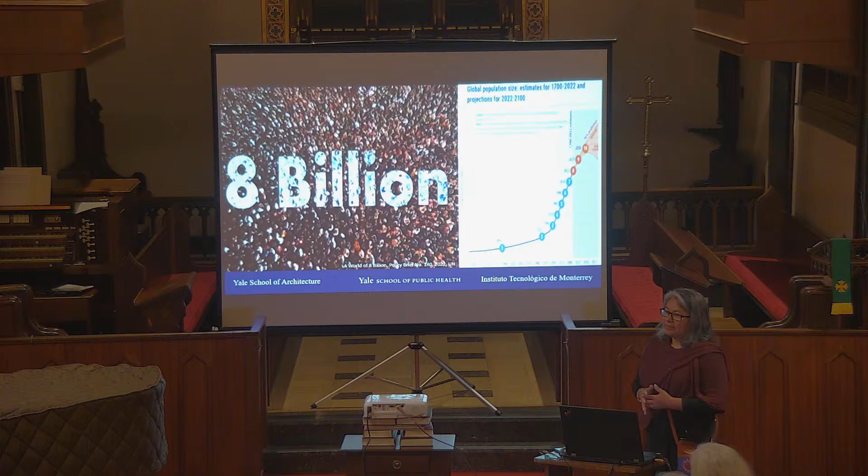This is really part 1 of explaining the whole project, so you're going to be eager to know what happens this semester. But this project really started from considering 3 major things that are going on the planet right now. One is the population growth, what's happening in remote parts of the world. I was born in El Salvador, and I traveled to all sorts of Latin American countries, Asia, and other places for work.

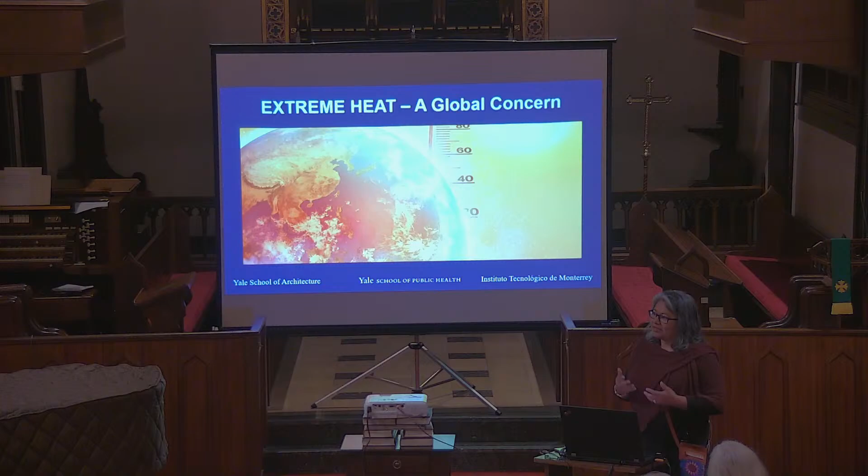There is a universal set of conditions that are impacting us and communities all over the world. The other global factor that influenced my applying for this grant was the sense of extreme heat, and how a lot of these communities in remote areas, without infrastructure, no electricity, no way of affording other methods of cooling their dwellings, really learning and living and growing in that environment came to the forefront. And then concerns about just the overall chronic conditions of extreme heat.

Deforestation being a major cause for a lot of these communities that really can't face climate change in an equitable way. And as an architect, we often talk about the housing crisis. The World Green Building Council estimates that we have to build 96,000 new affordable homes every day to meet the deficit.

Every day. And so putting these things together really brought to light some of the things that give us hope, right? How can we impact this? As educators, as community builders, as just general global citizens, trying to find a solution.

One of the things that really struck me was how great the percentage of self-built structures there are. I know we make a living in architecture, and we really often fail to consider, wait a minute, most of the world's structures are not built by or designed by architects. They're self-builders. They're people trying to make do, especially in these communities.

And so figuring out how to impact that whole segment of the construction industry, like you pointed out earlier, it's a huge percentage of the footprint of the carbon that we're trying to deal with. And so taking advantage of that, we say, how can we impact that in a passive way, in a low cost, affordable, and accessible way, and with equity.

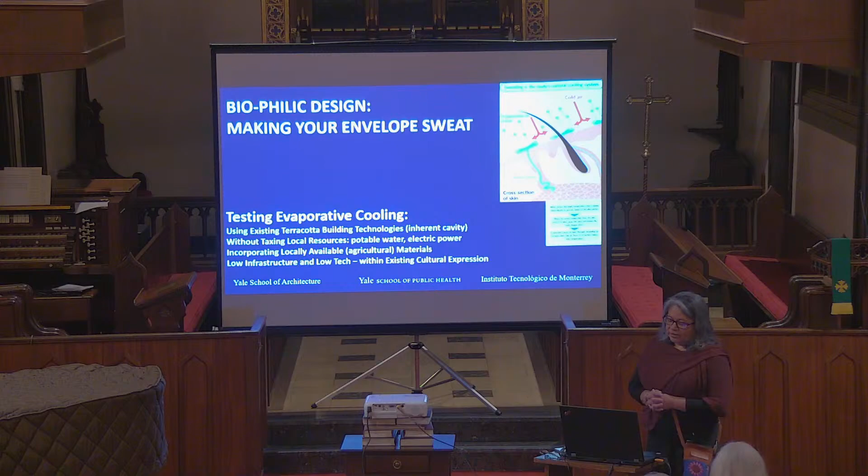So, because so many of us are self-builders and we all sweat, I looked at biophilic design, how to make your envelope sweat in a passive way. So passive cooling strategies, it is not without precedent, but one of the things that we noticed in a lot of the places that we're talking about, Asia, India, Latin America, in a lot of the South, people build with brick.

And there's an inherent cavity to when you fire a brick. You have to have an opening so that steam can be released and the brick module doesn't crack. So there's an inherent quality, and they use bricks all over the world. It requires often in places no local power. They fire these in self-built ovens.

And what is going on recently in a lot of Latin American places, certainly in Mexico where I'm working with the university, is they're starting to use other methods for agriculture that also don't require electrical feed or irrigation infrastructure, that are more passive irrigation technologies. So looking at those two things, low impact on infrastructure, already accessible new materials, finding a way of combining that, but approaching this problem with a sense of dignity and respect for the local cultures and how they're building.

Yes, they're all using brick. A lot of it is self-made, fired in your own backyard. But we need to learn and respect and approach every local region and how they do it. We can't just show up and say, this is how we should change. Starting from a point of understanding what is going on locally was important to us.

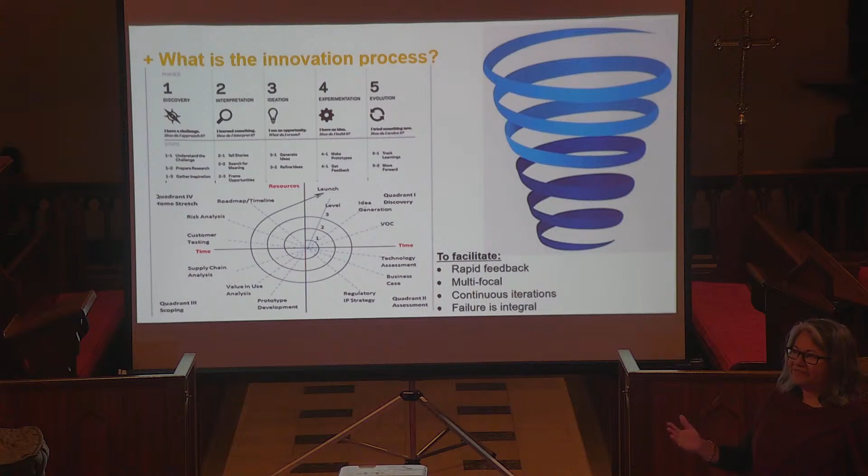Now, we understood from the get-go that we were going to fail, that things were going to have to go in a circular pattern, and the iterative nature of research was going to dictate the paths we took. But we still started from a point of view that it has to be data-driven.

We have to understand the kind of local materials people are using to build. Where do they get the earth to make their bricks? How do they bring the mud? What kind of makeup is happening in these places? And then understanding what kind of cavity is prevalent in these areas.

And then to make sure we understood how the community was open to collaborating with someone from outside, because that piece was important to me. I think we have to really look at it as a collaborative effort as we're approaching a community with a need, but really finding a way that they are learning to help themselves, and teaching us in turn how it is that would work best for them.

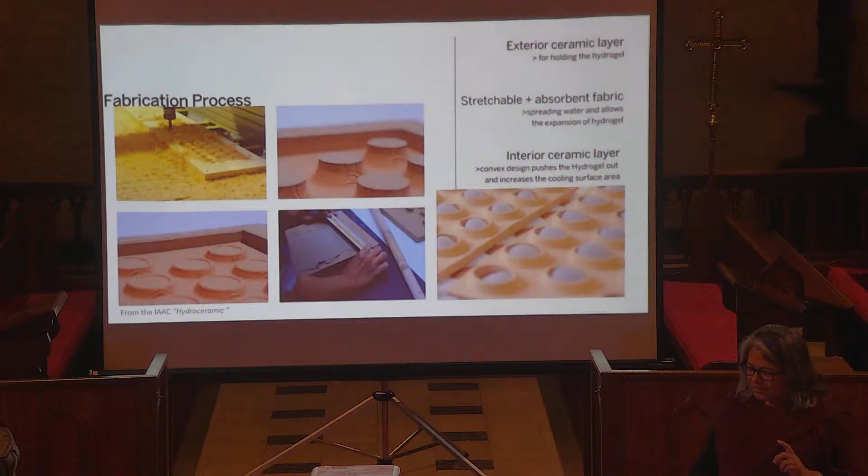At the Institute for Advanced Architecture in Catalonia, they are already testing how to design this bespoke tile that has high technology. It's 3D printed and has a really expensive footprint that is out of reach for a lot of the communities we're considering. However, an important thing that came out of their study was that the technology is feasible and can lower the temperature of a building by as much as 5 degrees centigrade—this is just in laboratory tests—that's about 9 degrees Fahrenheit.

And so we thought, all right, it's promising. Let's figure out how we can test that. There's many different ways to do evaporative cooling.

Evaporative cooling is like sweating, but in some places where it's a swamp, it's harder to get the evaporative effect going. So we started to make sure we covered all the different possibilities for evaporative cooling that could be there. Our students really worked to understand what we didn't want to do.

This is the high-tech version of evaporative coolers that are being built with terracotta. It's 3D printed terracotta. It's high-tech, I don't know how data-driven these are, but I'm sure part of the research we've seen shows they actually do work in minimizing heat in the structures.

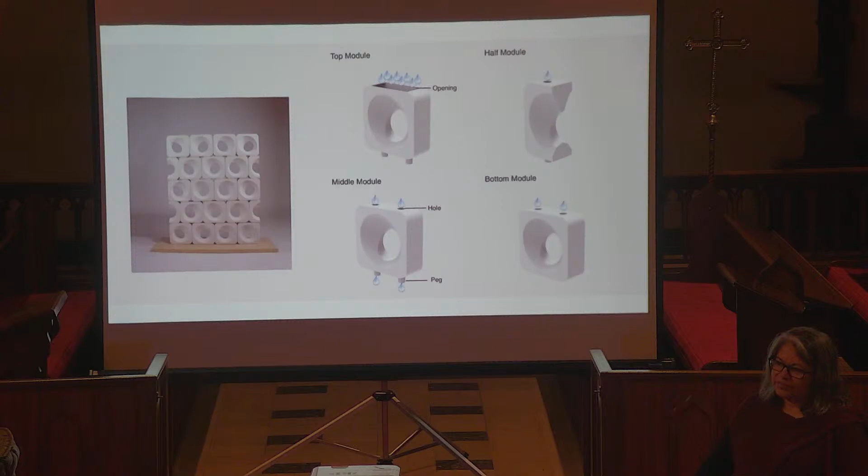There's an issue with water resources and how clean the water for some of these really high-tech modules needs to be. So we're understanding what is going on and definitely realizing this couldn't work in our remote communities that we're trying to help.

Now, a little bit about hydrogel. Who has children? I know I have a kid, but she always played with these Orbeez — your grandchildren might have played with them too. Orbeez are ubiquitous.

They use them right now for the garment industry, in diapers, in water wicking fabric. They're using them to pack materials because they're low impact in many other places. And like I mentioned earlier, in agriculture, it has very minimal infrastructure requirements for irrigation, and it is pretty much accessible — even in the remote area where we are working, you can obtain agriculture grade hydrogel.

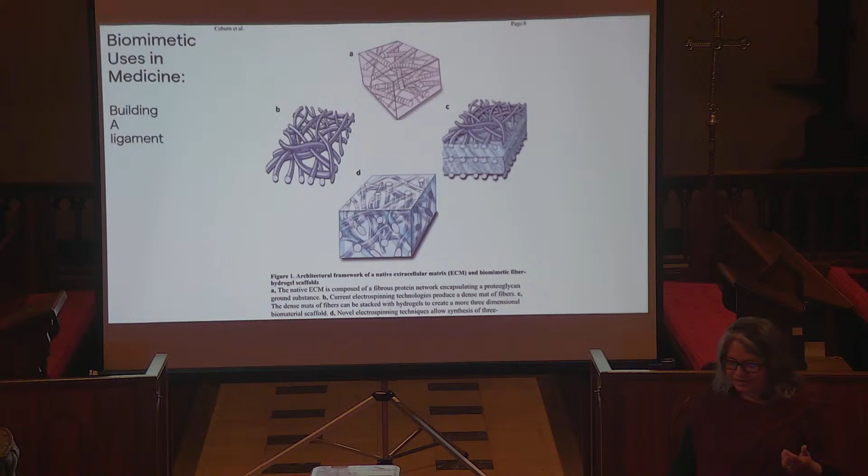It is also used in medicine. They're growing all sorts of things in hydrogel and combining hydrogel to create all sorts of biological implants and transplants.

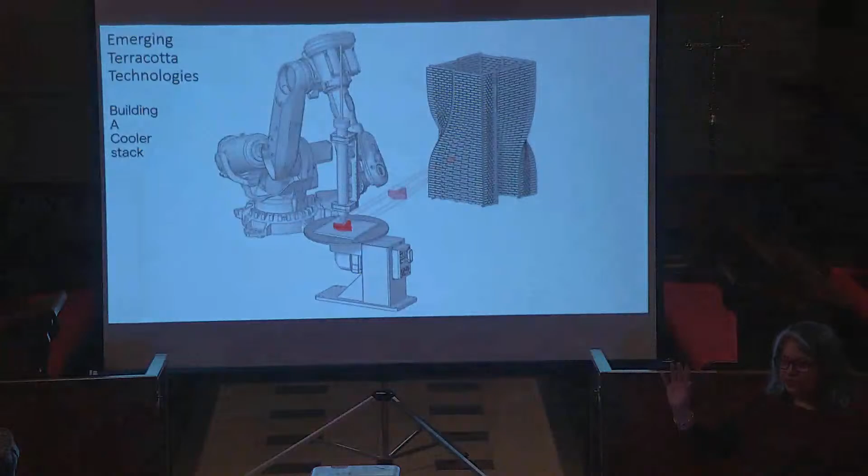So we also were interested in where's the range beyond the hydrogel and the passive cooling. What are people building with terracotta as well? Again, there's very high tech stuff out of affordable reach for most communities, although this had a lot of interesting ideas for us, because as you start to look at 3D printed modular stuff, it is becoming more and more affordable and more prevalent.

Blackstone Library has a 3D printer, so it's not too far from us, but in a lot of the communities we visited, it was not feasible. So we're back to how people build locally and what kind of things they do.

We also want to make sure that we maximize the knowledge of just how you're putting stuff together without really changing anything else. How do you put it together? Self-shading is one of the things we're trying to teach people.

You're already building with bricks — these are off the shelf — and then it's just how you compose them, how you stack one on top of another. The upper brick can put shade on the bottom brick, and that already brings down the temperature of that wall.

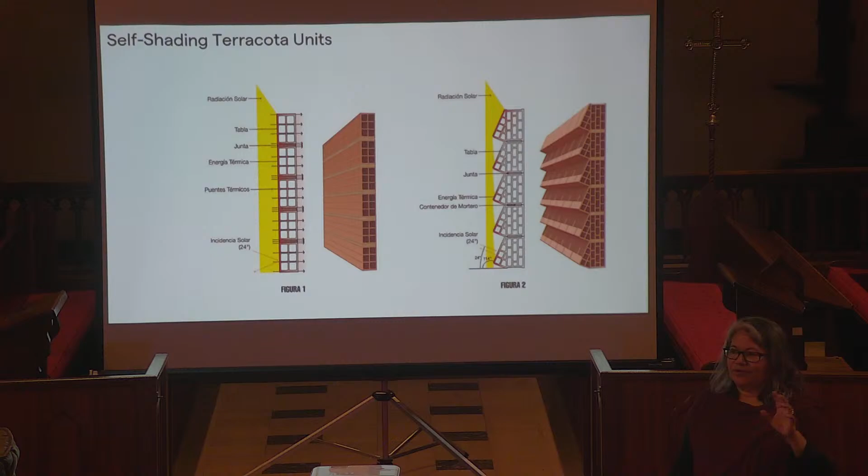So we're incorporating things that are already kind of low-hanging fruit to help passive cool some of the structures. Here you can see it's just about stacking and rotating, and it still maintains the structural integrity of the wall. So a lot of these things we're already collaborating with the community on.

Now this is the meat of my work. We, again, are looking at how do we stack these things, how do we charge the hydrogel. The students wanted to do the 3D thing. How do we make the 3D thing affordable, right?

A lot of the studies that we're doing include three key components. In order to really say this works to lower the wall temperature, we are building a 3D digital model — we call that the digital twin of the building that we will build in the real world to test this.

We create simulations in that digital model. We put in the local temperature, humidity, the orientation, and other terrain information, as well as vegetation and where shading or other adjacent structures are. That way we understand what's really going on in the microclimate of the thing we're building.

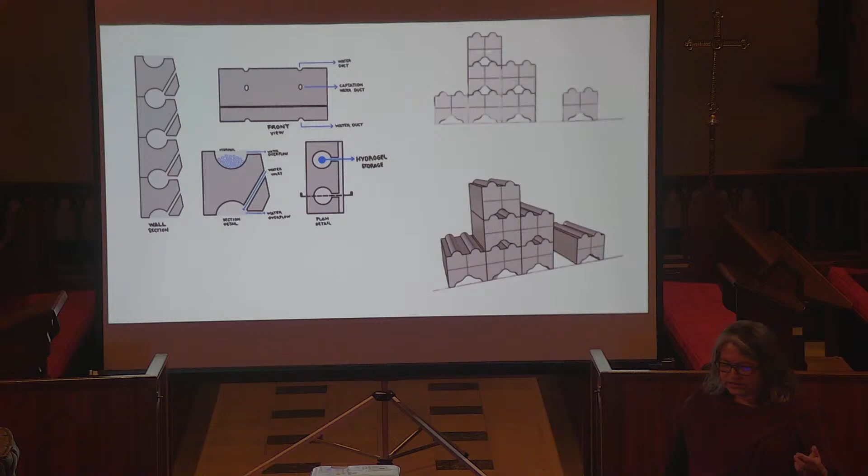And then we are including ideas into that 3D model to test how the water moves, how the building drains, how the wall drains, and where rainwater could be put in or not. So these are just different tests that the students put together.

We discarded 95% of them because they're too expensive. So it was informative — once we went to the community it was like, okay, this is not really feasible because the fabrication process is out of reach.

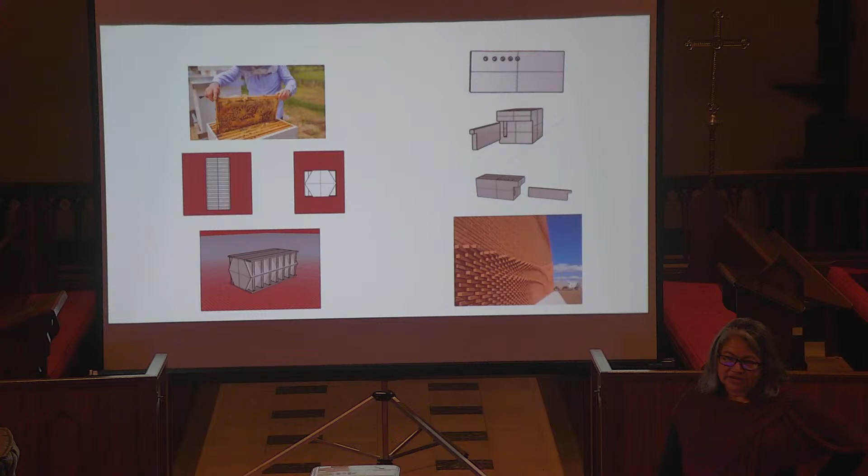The whole process, and I showed you the whole spiral going around in circles, really was about understanding access, implementation, and the lifespan and integrity of the hydrogel. Now, hydrogel has a lifespan of 5 years, so what we learned in the preliminary studies is that we have to have a way of replacing it.

This is not an alien issue for a lot of the vulnerable communities we visited, because people who build with mud, adobe, or thatch are constantly maintaining. There's a sense of we have to continue taking care of our structures. They didn't seem to have a problem with that when we spoke with them. They just thought the issue with incorporating the hydrogel wasn't so much replacing it every 5 years, but the danger of people wanting to steal the hydrogel from your house. So making sure we made it accessible, but not too accessible.

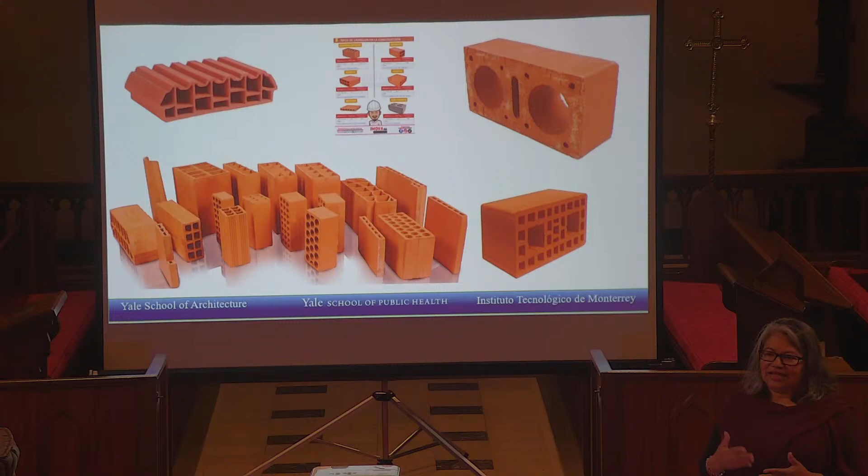So those were the things that, as collaborating with the community, you begin to understand, and that is a design driver down the line. We have built into the digital model also the idea that the entire south wall, which is the hottest wall, could be the one that provides the cooling, and it starts to affect the whole structure.

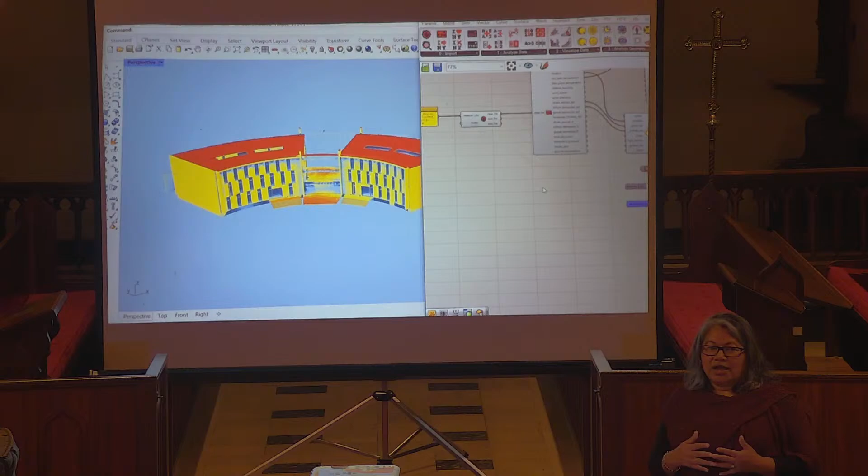Now, a word about the scale of the structures. A lot of the places, you're not really trying to cool a building this size. They're very small, humble buildings. Even the schools are not giant spaces, and so cooling the major heated wall actually goes a long way toward cooling the entire structure. This is why we need to build a whole room, not just one wall, so that we understand what happens in the interior space and how that impacts the other 3 walls that are not exposed to the high heat.

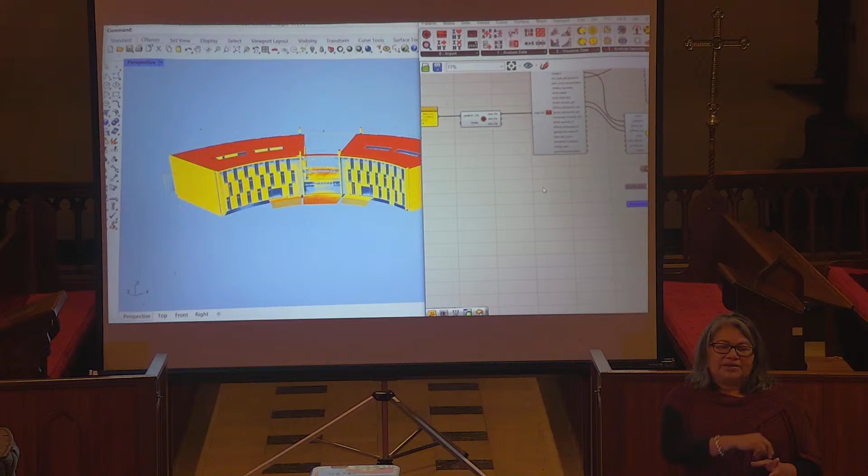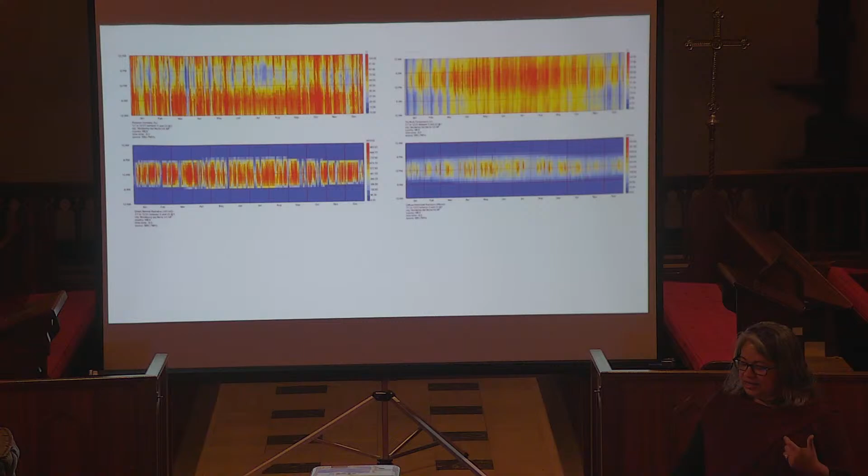has lived on the volcano's skirt. It was established in like 1564 or something. It's ancient, it's a syncretic community. They speak Nahuatl, most of them. They're of indigenous backgrounds, basically agricultural based.

When you speak to them and try to understand their awareness of context, their awareness of climate change, it'll blow you away. One of the ladies told me 10 years ago the cows didn't get as fat. Now we have really obese cows and cattle because the trees are growing so much more, because there's so much more rain. And so much more rain has changed the kind of vegetation we're able to grow. We can't grow some crops that used to feed us and that we used to sell, and now everything has changed. They're aware of the whole intricate network of these changes that come from climate change.